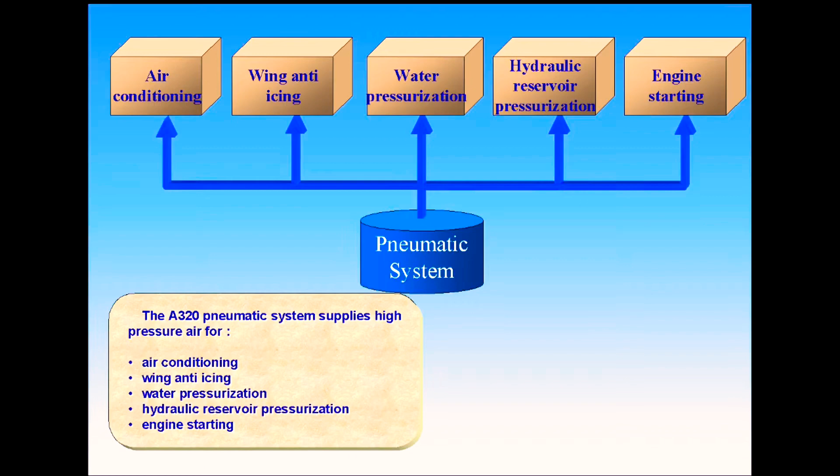A320 pneumatic system supplies high-pressure air for air conditioning, wing anti-icing, water pressurization, hydraulic reservoir pressurization, and engine starting. High-pressure air can be supplied from three sources: the engine bleed system, the APU, and an external high-pressure ground power unit.

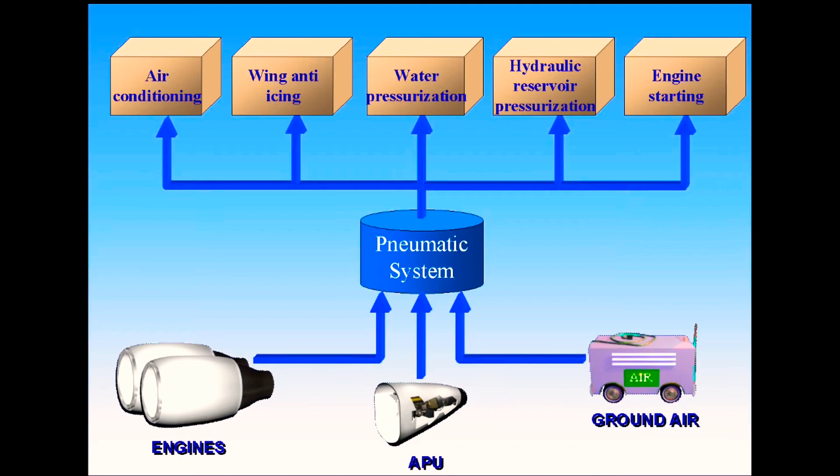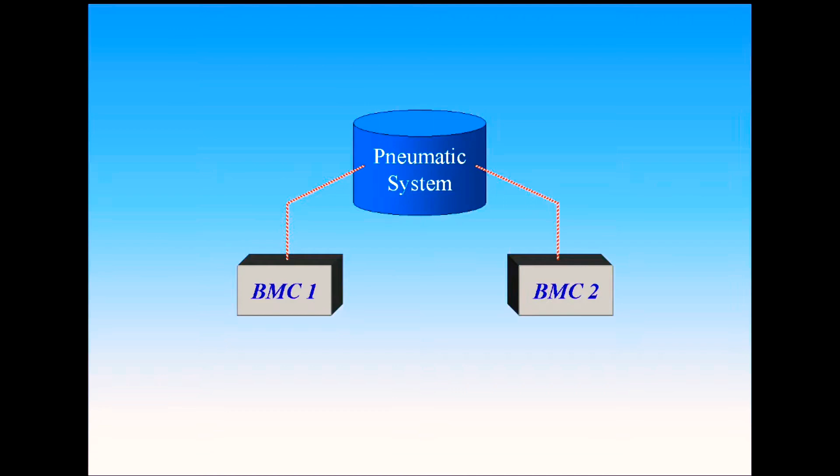The pneumatic system is controlled and monitored by two bleed monitoring computers, BMCs. There is one bleed monitoring computer for each engine bleed system. Both bleed monitoring computers are interconnected, and if one fails, the other takes over most of its functions.

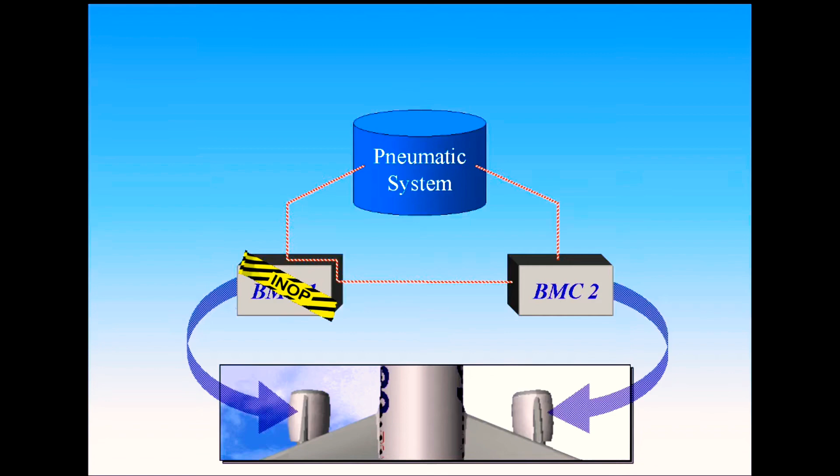There are air leakage detection loops installed in the vicinity of the hot air ducts in the fuselage, wings, and pylons. If a leak is detected, a signal is sent to the bleed monitoring computer, which automatically isolates the affected area. Bleed monitoring computer number 1 protects the left wing, number 1 engine, and the APU.

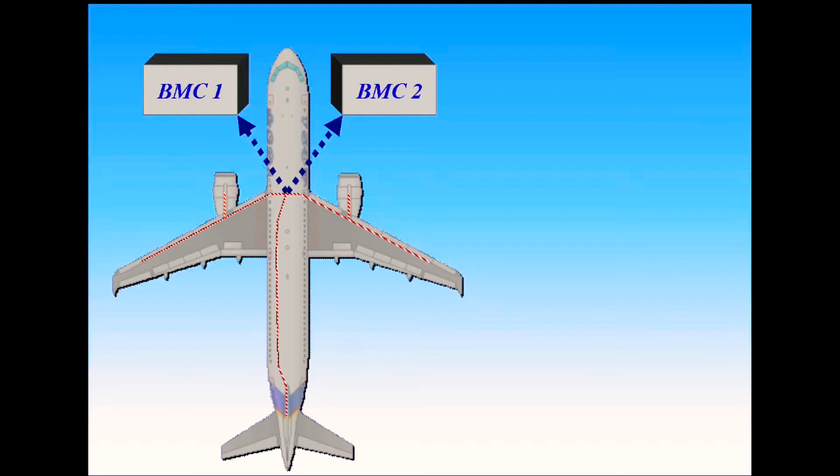Bleed monitoring computer number 2 protects the right wing and the number 2 engine. Should number 2 bleed monitoring computer fail, number 1 will take over all its functions, except for the pylon. Should number 1 fail, number 2 will protect all but the number 1 pylon and the APU.

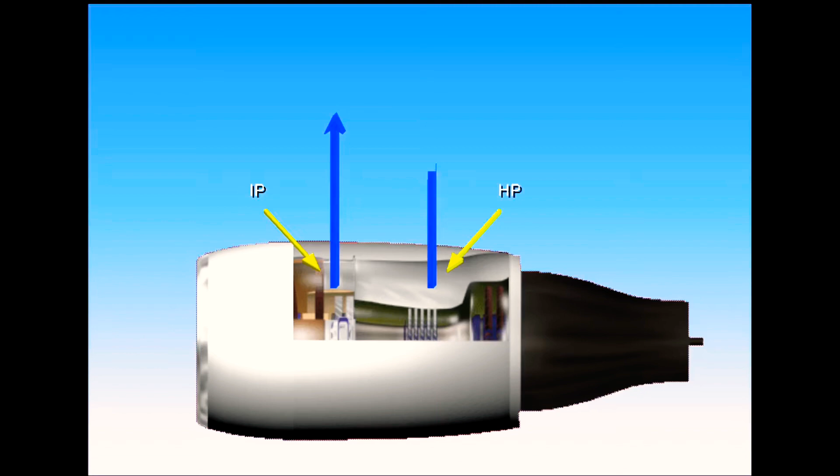Air is bled from two compressor stages of the engine, the intermediate pressure, IP port, and the high pressure, HP port. There is a high-pressure valve which can cut off bleed air from the high-pressure port. It is automatically controlled by the system.

The high-pressure section, HP, is only used when there is insufficient pressure from the intermediate output, IP, that is, when the engines are at idle. Once the engine speed is high enough, the IP intermediate pressure is sufficient and the high-pressure HP valve closes.

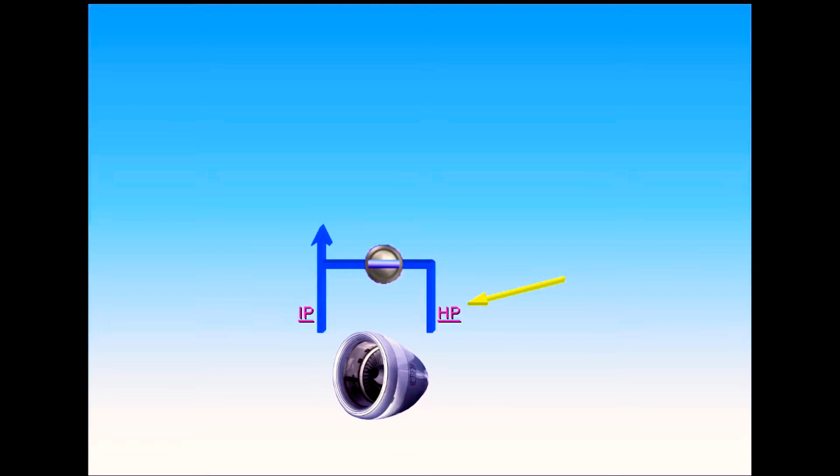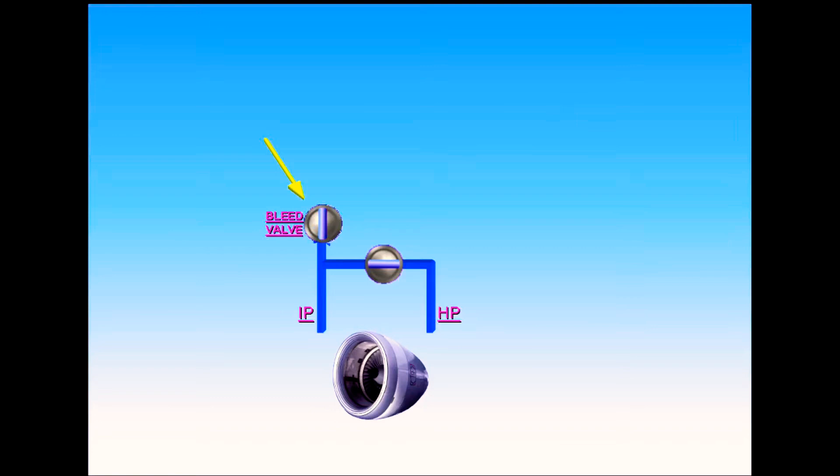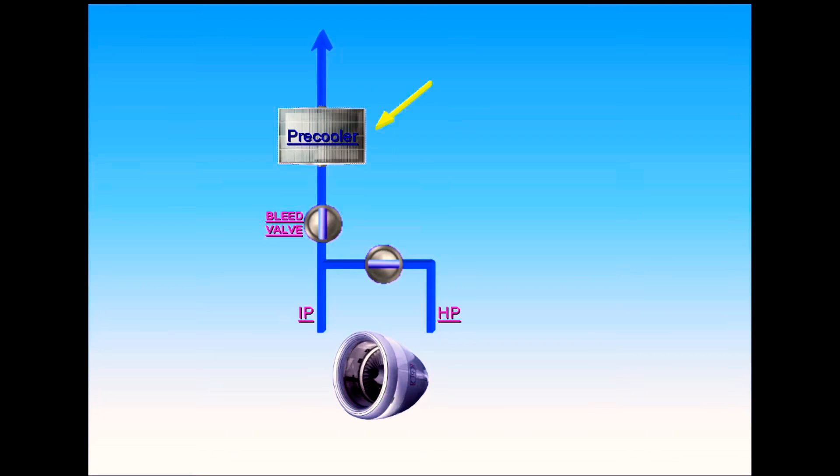The air extracted from the compressor then goes to a bleed valve, which acts as a shutoff and pressure-regulating valve. Since the temperature of the bleed air is high, it passes through a pre-cooler before being distributed to the users. The pre-cooler uses cool air from the engine fan to regulate the temperature.

Engine 2 has an identical bleed system. Both systems are connected by a cross-bleed duct. A cross-bleed valve permits their interconnection or isolation.

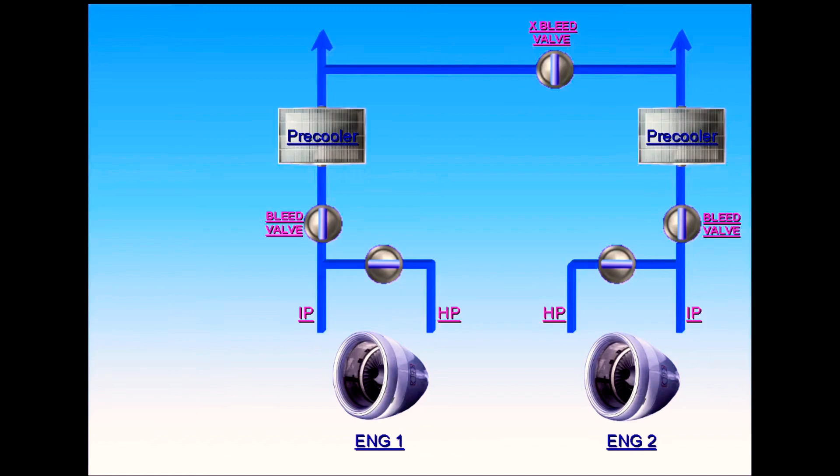The APU can also be used for bleed air supply. This is usually done on the ground for air conditioning and for engine start. However, APU bleed air is also available in flight. APU bleed air is controlled by the APU bleed valve, which operates as a shutoff valve.

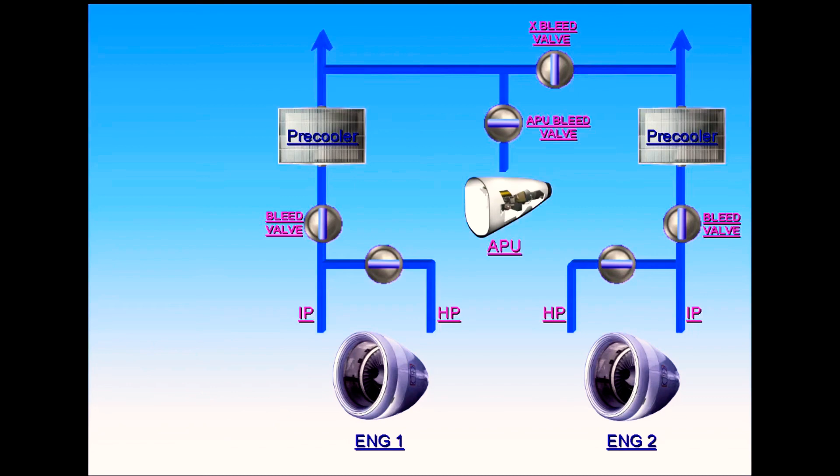Should the APU not be available, a high-pressure ground power unit can be connected. This completes the pneumatic system. We will now show you how system information is displayed to the pilots.

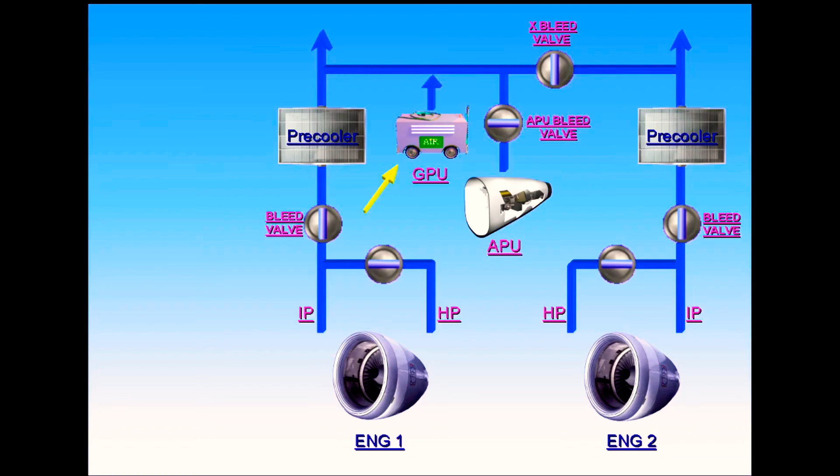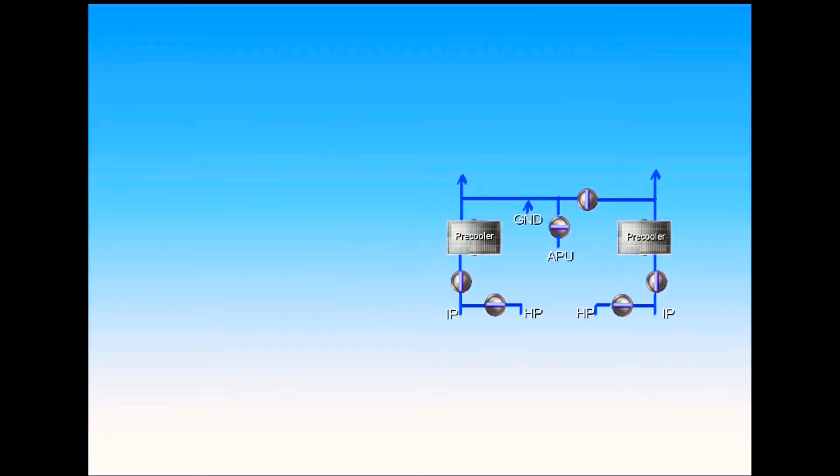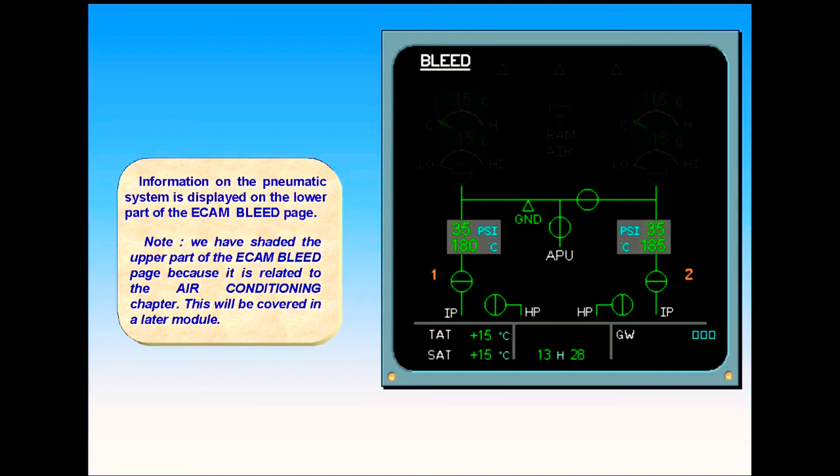Information on the pneumatic system is displayed on the lower part of the ECAM bleed page. Note, we have shaded the upper part of the ECAM bleed page because it is related to the air conditioning chapter. This will be covered in a later module. Let's identify the system components on the ECAM page now.

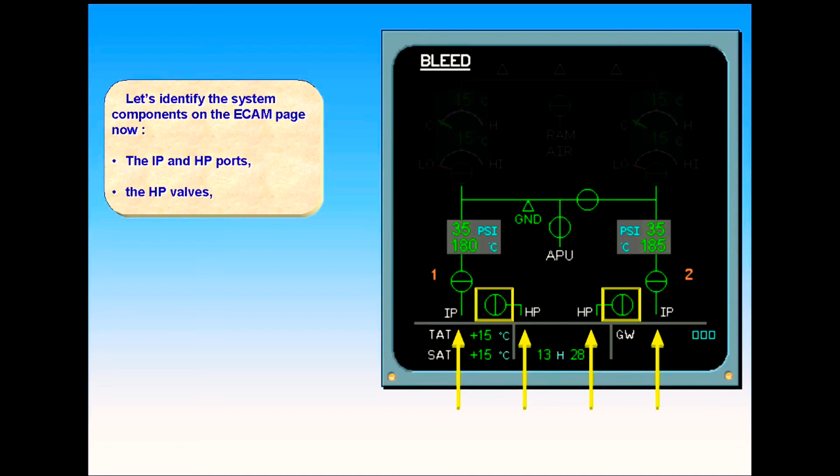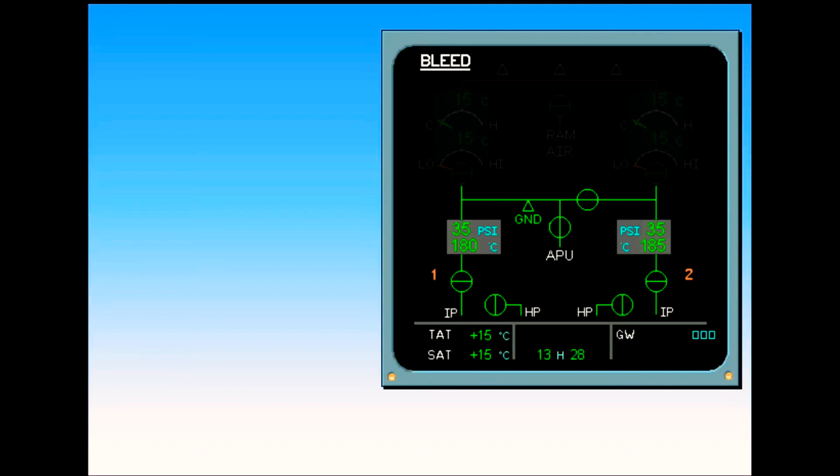The intermediate pressure and high pressure ports, the high pressure valves, the engine bleed valves, the pre-coolers, the APU bleed valve, the cross-bleed valve, the high-pressure ground connection. The following information is also displayed: bleed air pressure, bleed air temperature, engine identification numbers.

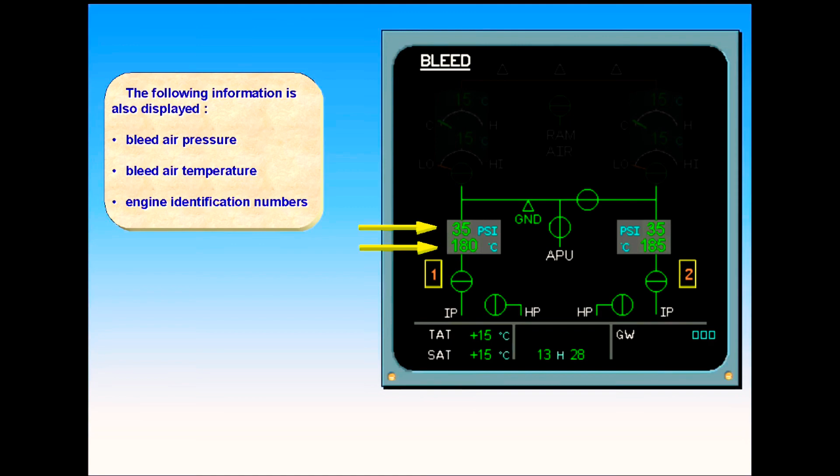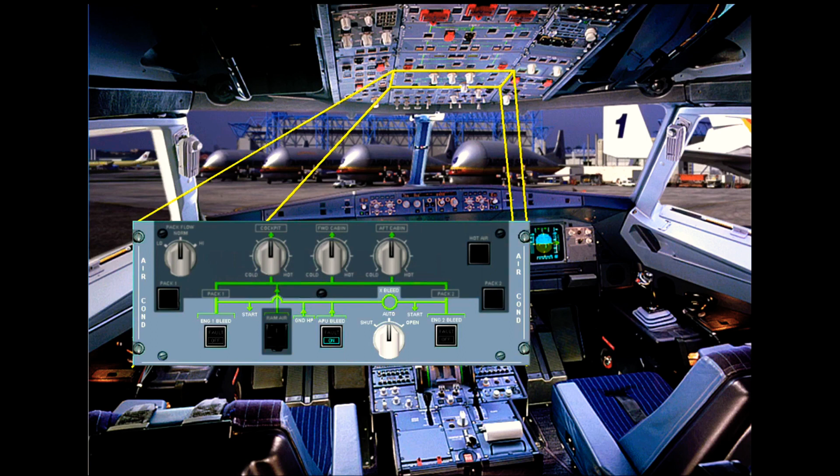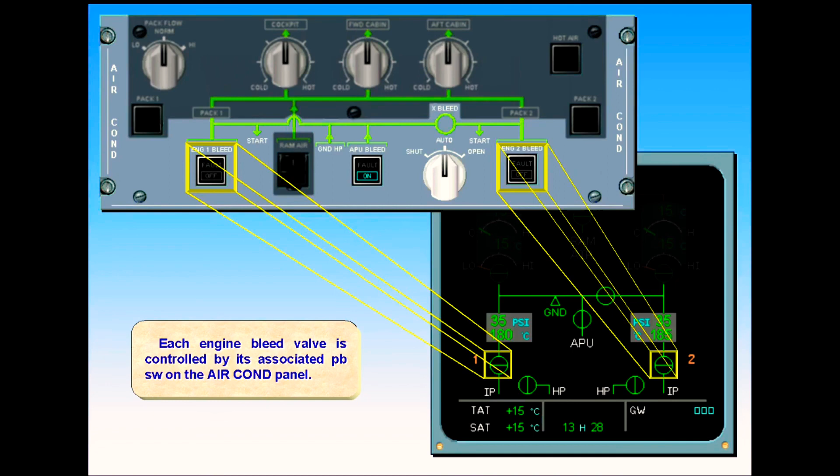Controls for the pneumatic system are part of the air conditioning panel located on the overhead panel. Again, we have shaded those controls which belong to the air conditioning chapter. Each engine bleed valve is controlled by its associated push-button switch on the air conditioning panel. The APU bleed valve is controlled by its associated switch.

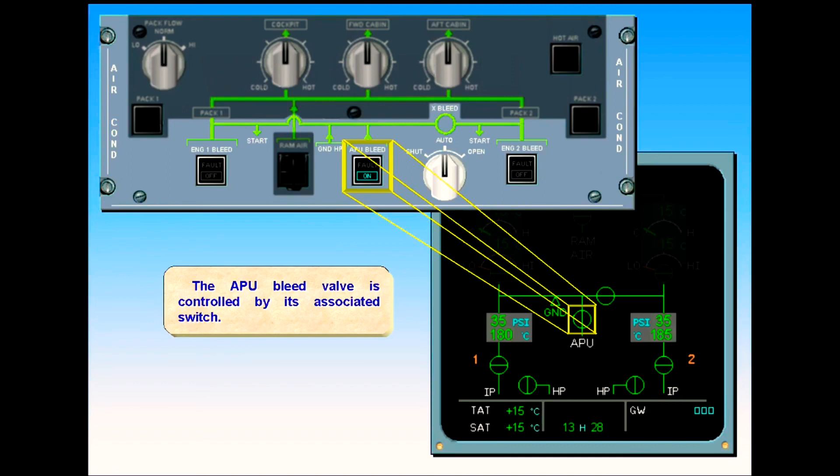The cross-bleed selector enables the pilot to open and close the cross-bleed valve manually or to let the system operate the cross-bleed valve automatically.